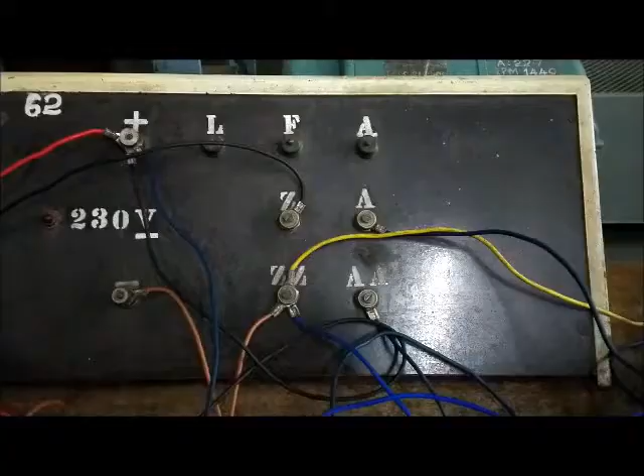What you are seeing is the terminal board, and when you see the terminal board, this is your positive terminal and this is your negative terminal, and the magnitude is about 230 volt. So this point LFA corresponds to the starter. It is a 3-point starter, and for this particular experiment we are not using the starter, so we are using rheostat, that is armature rheostat, to give the maximum resistance. So at the time of starting you have to give maximum resistance, so this point you have to note it down.

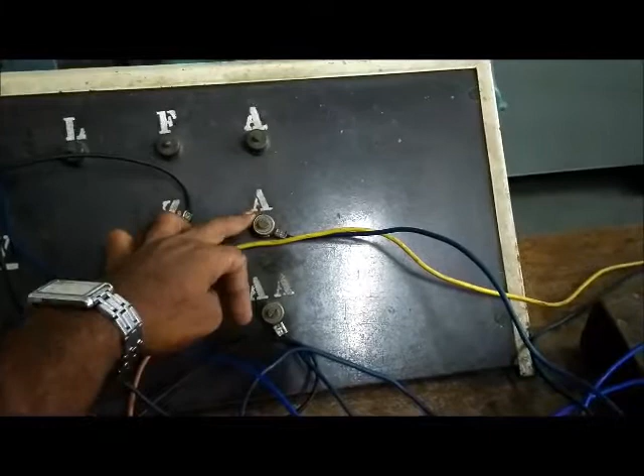And when you see the terminals, this Z represents the field terminal, starting of your field terminal. ZZ represents the finishing end of your field terminal, where A represents the armature winding, so A denotes the starting end of your armature terminal, AA represents the finishing end of your armature terminal. So these are your motor terminals. So Z represents the field winding, A represents the armature winding.

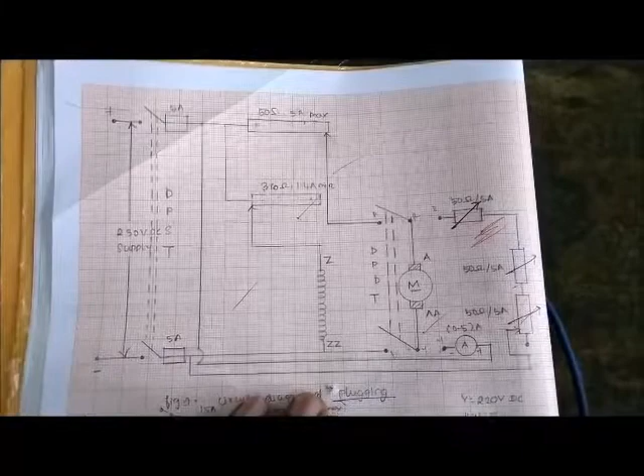So this is the circuit diagram of plugging. So what is plugging is, you will reverse the supply to suddenly stop the motor when you remove the power supply. So this is the circuit diagram. So this is your 230 volt DC, and this is your DPST switch, that is double pole single throw switch, and this is your armature rheostat, and this is your field rheostat.

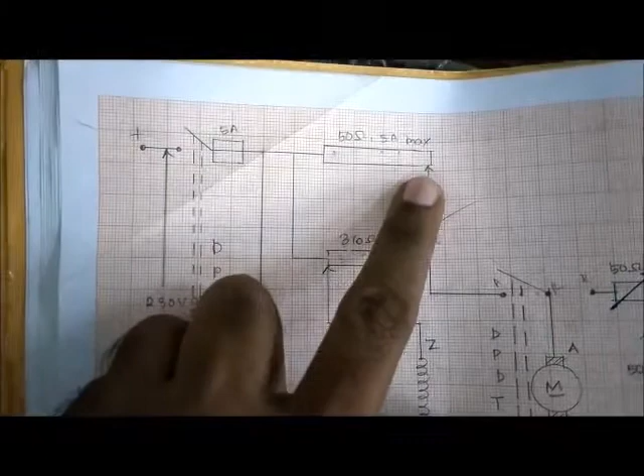So what you have to note down is, at the time of starting your armature rheostat should be at maximum position, so that is denoted over here by this slider arrow mark. And the field rheostat should be at minimum position, so that is denoted over here. So you have to note this. So this is the precaution at the time of starting.

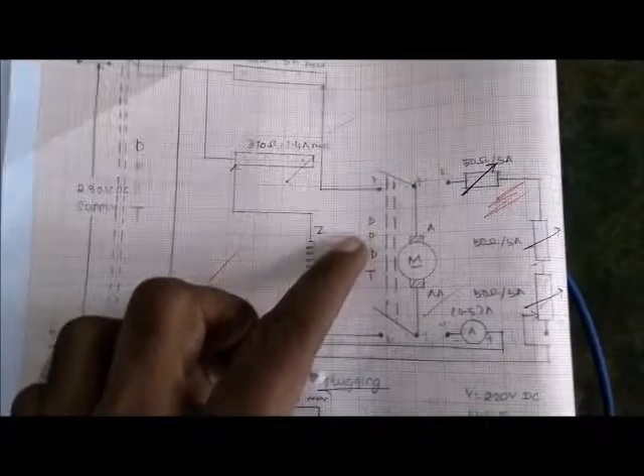So when you see here, this is your DPDT, double pole double throw switch, and this experiment is about plugging actually. So we know what plugging is. It is about reversing of the power supply, that is by creating reverse torque we are going to suddenly stop the motor. So this circuit belongs to that. So now we will see how to connect the forward motoring. So first we will see about motoring.

Now we'll start the motor. So this is your DPST switch, double pole single throw. Now you see the terminal board, yes, it receives the power supply. So this is indicated by a lamp actually. Now I am going to close the double pole double throw switch in motor side. Okay, so now you can see the motor is in rest position and the speed is 0.

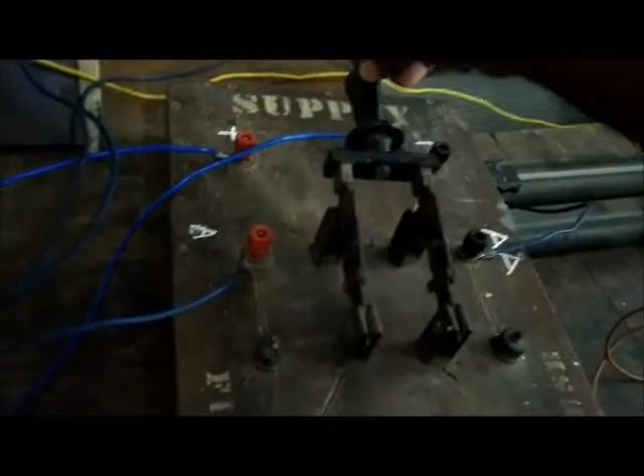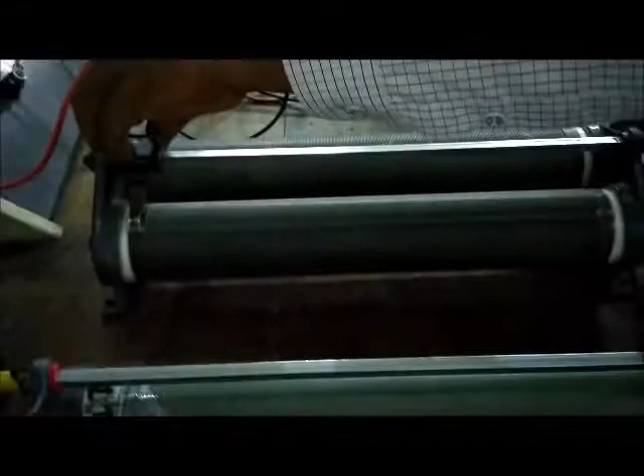Okay, now see here, now I am going to close the double pole double throw switch, and you can see the motor starts to rotate. Now I have to cut down the armature rheostat. I have to bring it to minimum resistance position. So while I am doing this, the speed will increase.

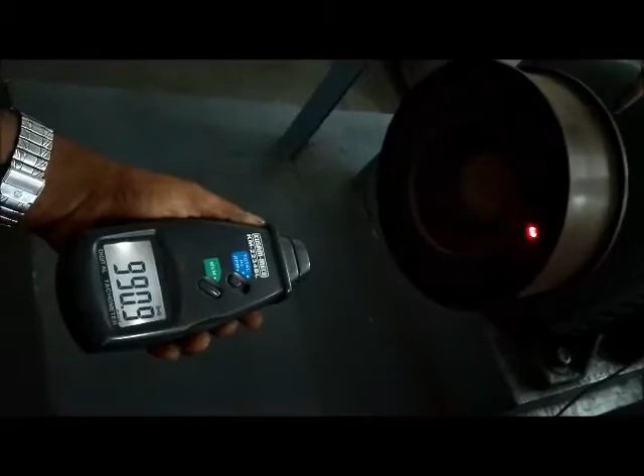Now see here, the armature rheostat is cut to 0 resistance position. Now I am adjusting the field rheostat to bring it to rated speed, and we know the rated speed is 1440 RPM.

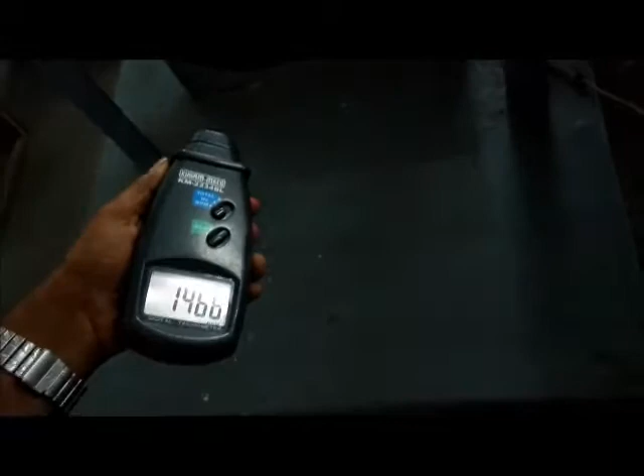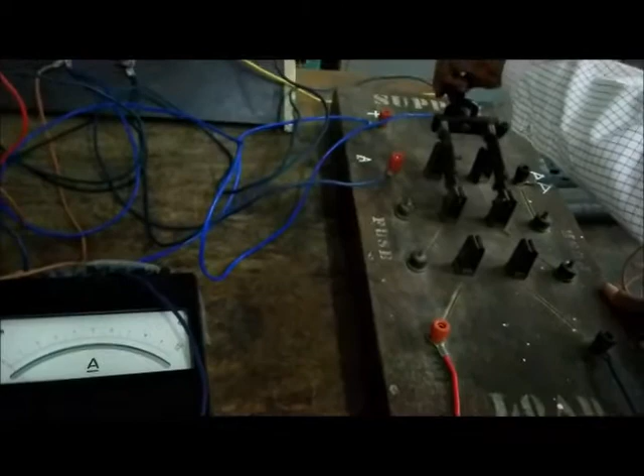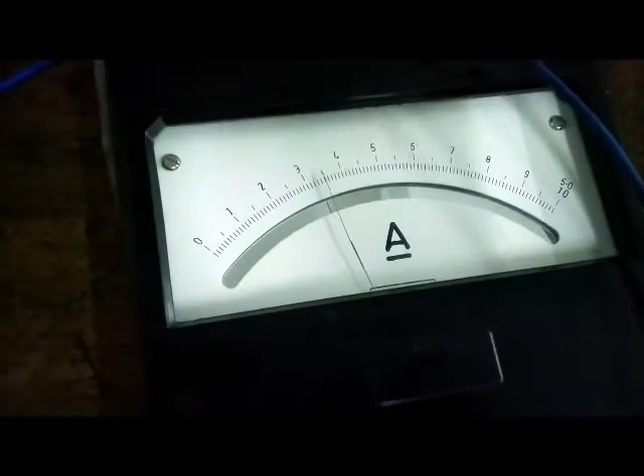Okay, we brought it to rated speed. Now what we have to do is plugging. So now I am going to reverse the power supply by using the DPDT switch. Now I have reversed. Now I have to note down the current, and it brought it to 0 speed.

At 0 speed you have to open the DPDT switch, otherwise the motor will start to rotate in the reverse direction. So for this particular current it took around 6.6 seconds to stop. Okay, so it took 6.6 seconds to reach 0 RPM.

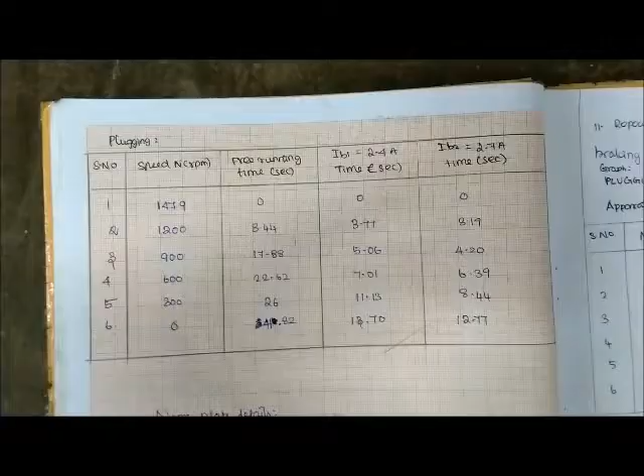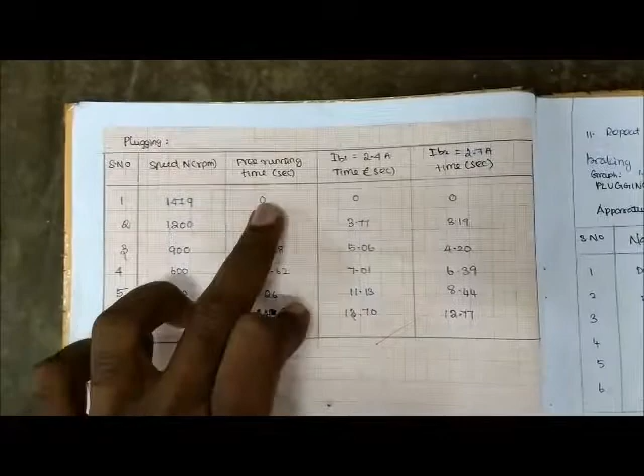What you are seeing is the plugging characteristics. The first column represents the speed, the second column represents the free running time, the third represents a braking current of 2.4 amps, and the fourth represents a braking current of 2.7 amps. So what is this free running time? At 1200 RPM, when you remove the power supply, it took 8.44 seconds to stop.

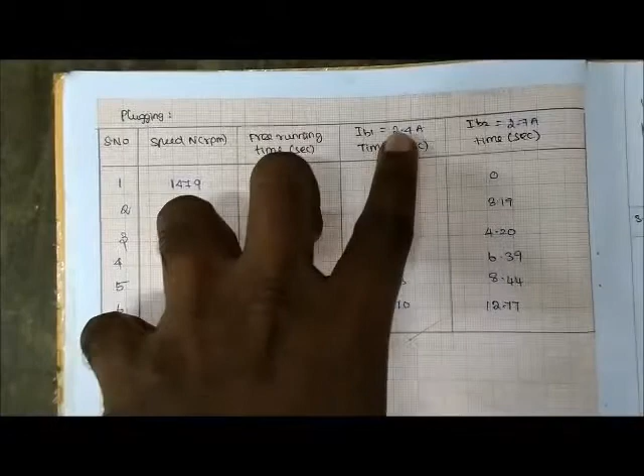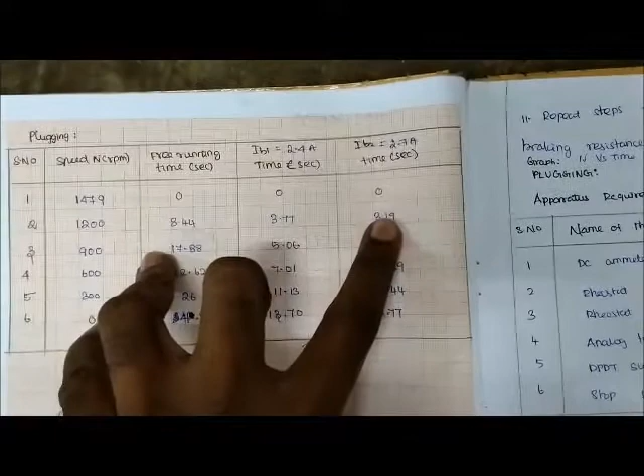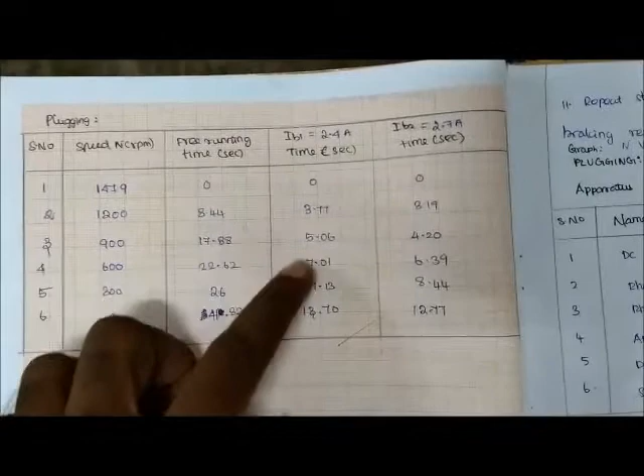When you reverse the power supply for this particular current, it takes only 3.77 seconds to stop. For the same value, at 2.7 amps, it took 3.19 seconds to stop. Similarly we will take several readings for various currents, and this is the decaying characteristic. So for this it took 12.70, and for this it took 12.77.

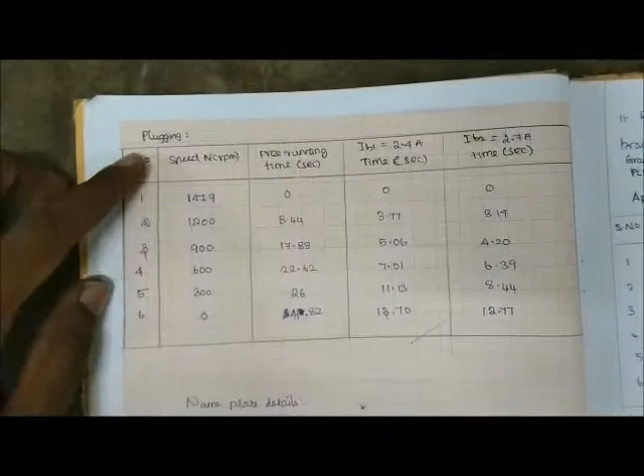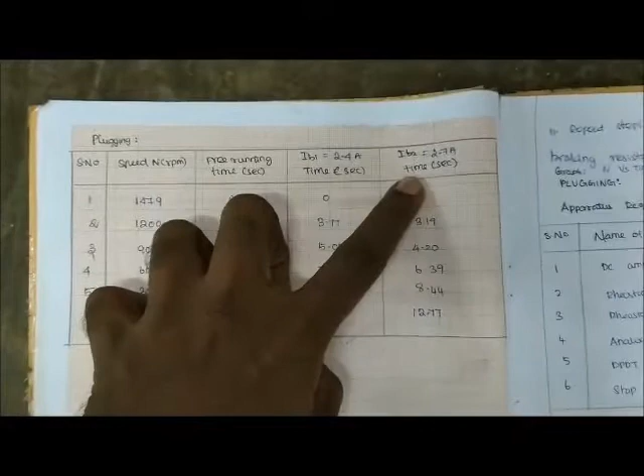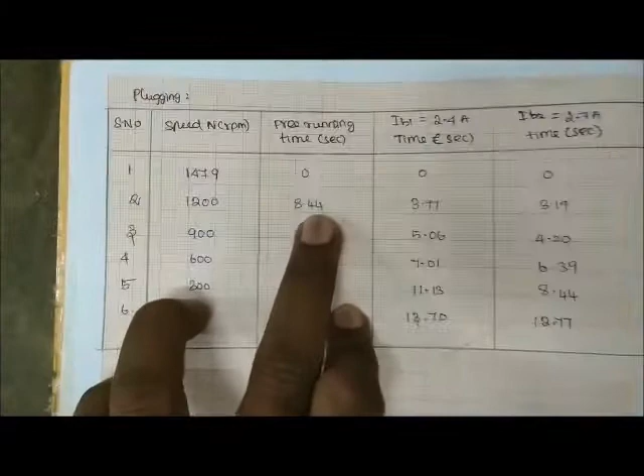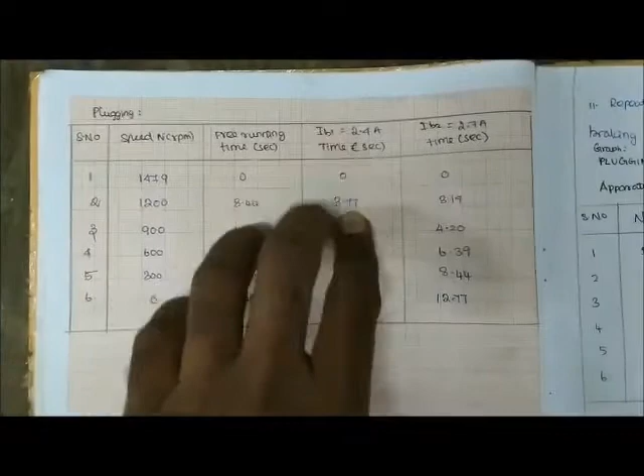So that's it. What you are seeing is the plugging characteristics. The first column represents the speed, the second the free running time, the third a braking current of 2.4 amps, and the fourth a braking current of 2.7 amps. At 1200 RPM, when you remove the power supply, it took 8.44 seconds to stop. When you reverse the power supply it takes only 3.77 seconds, and at 2.7 amps it took 3.19 seconds to stop.

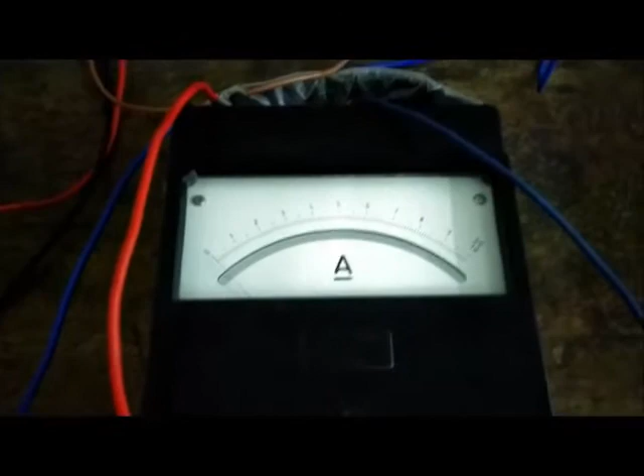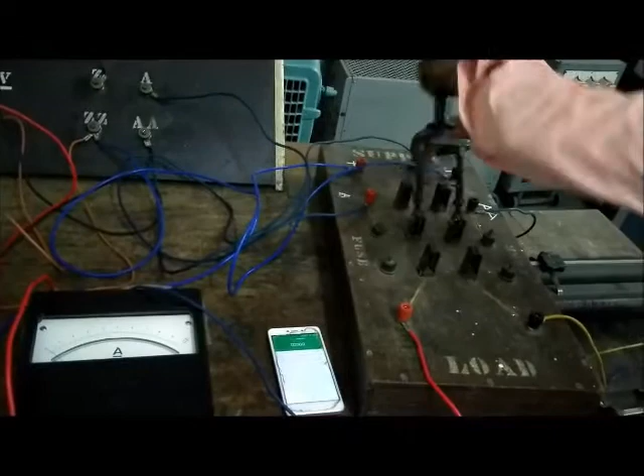Now you can see the switch is in motoring mode, and look at the current. You have to note down the current. Yes, we are going for dynamic braking now. This is your braking current, around 1.5 amps. It took 7.3 seconds to stop for this particular current. Dynamic braking, this is for the second set of readings.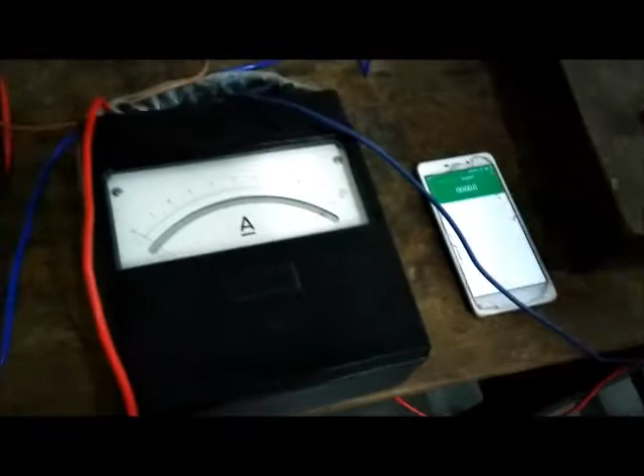Now I have changed the rheostat, to around 30% resistance. Now we will see the stopping speed of our motor. We can see the reset time, and we can see the current. When you look at the current, it reaches around 6 amps.

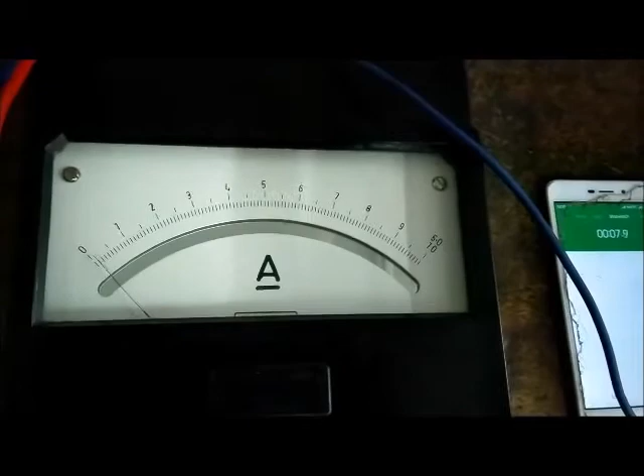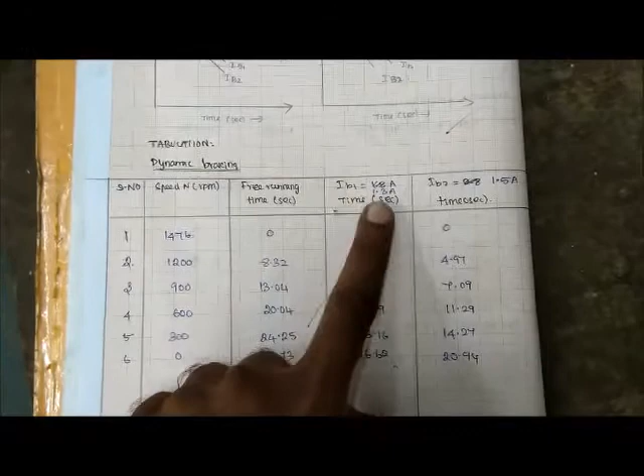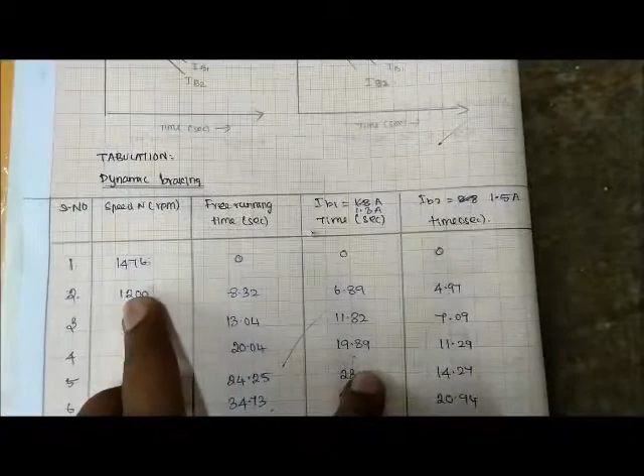This tabular column is about dynamic braking. First you have to bring the motor to rated speed. The third column represents the current. It is about 1.3 amps, and for this it is about 1.5 amps. For 1200 RPM, the free time, that is the time taken to settle down freely without applying anything, is about 8.3 seconds.

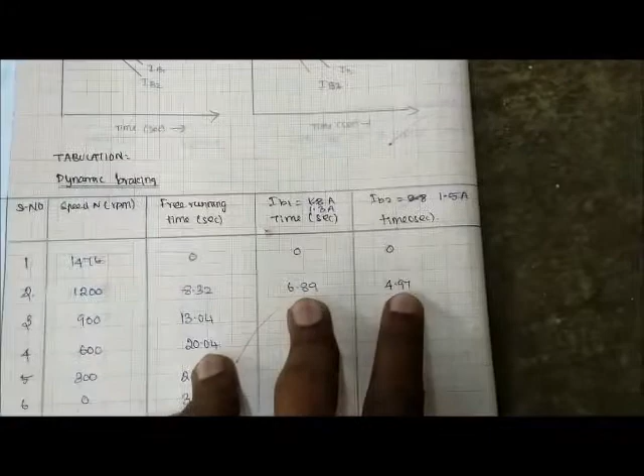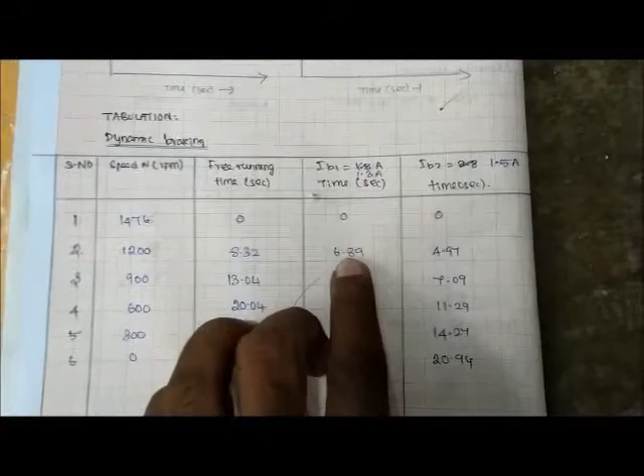For the current of 1.5 amperes, it stops at 4.97 seconds, and for 1.3 amps it stops at 6.89 seconds. So it takes more time to settle down. This you have to note down.

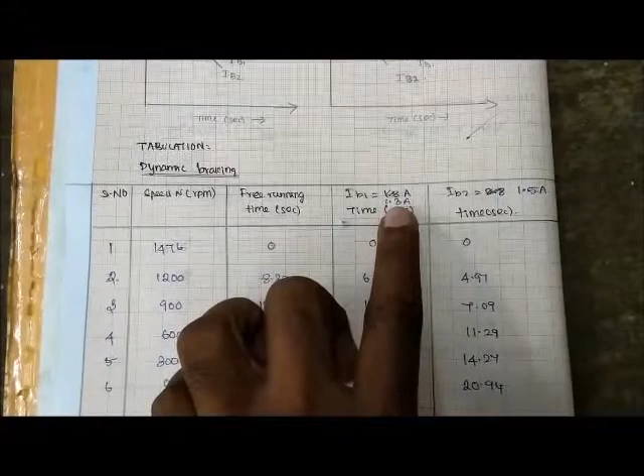It is about I squared R loss. Since the current is very less, and you know the relation between current and resistance is inversely proportional, when the current is less it takes more time to stop, and when the current is high it takes less time to stop. This you have to note down.